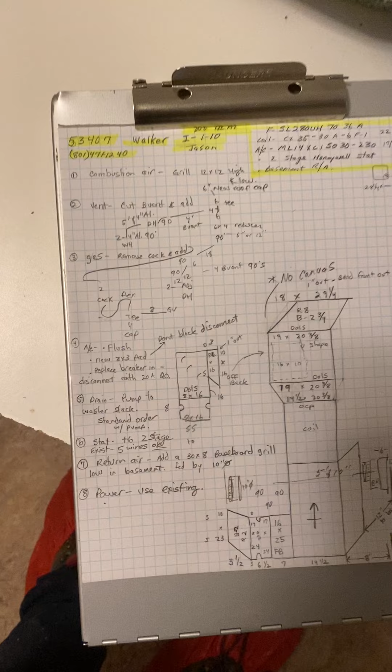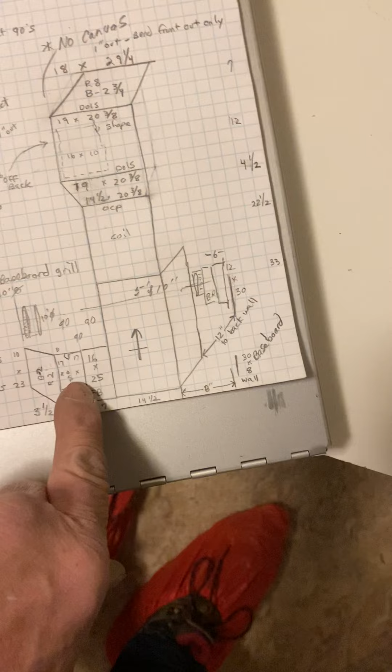Okay, this is for the Walker job, number 53407. Install on 110 by Jason. This is a no heat. Okay, so the duct furnace will just sit on the ground. I have a 7-inch wide filter box, no canvas. I have a cut line right here.

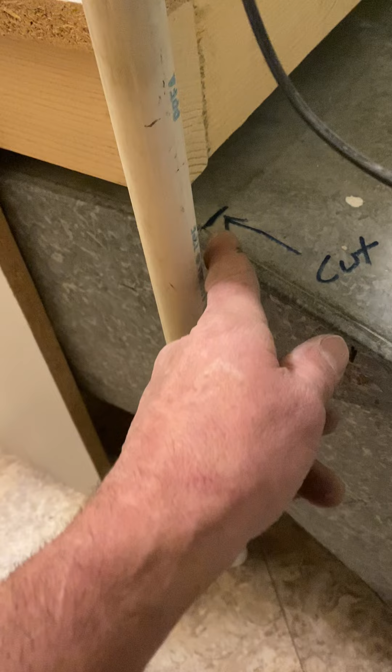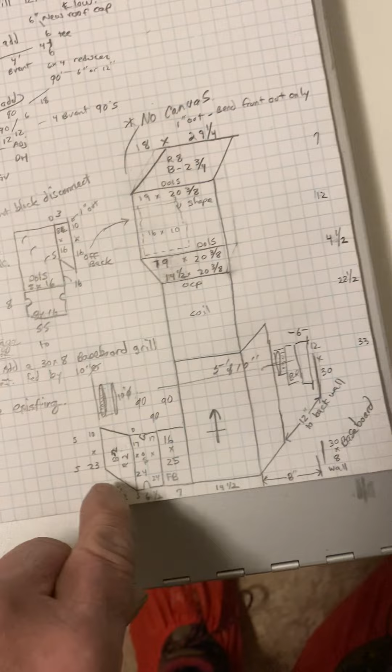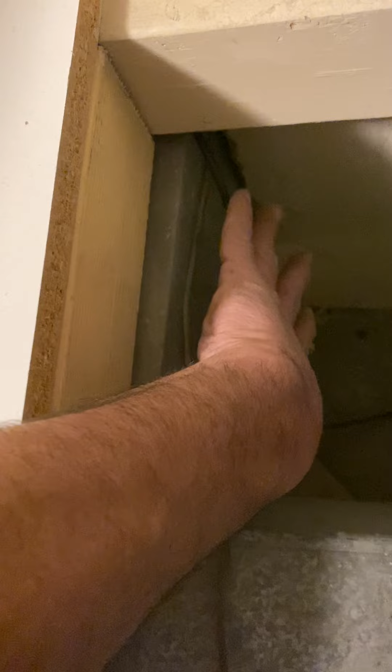So, you know, your adapter right there. 4.5 inches. Okay, so on the back of here, right here is your other cut line. So right here you have 10 inches. I'll give you a 10-inch round collar and some 90s, but you're going to add a 10-inch round return. You have 16 by 10 here. It'll be tight, but you can do it.

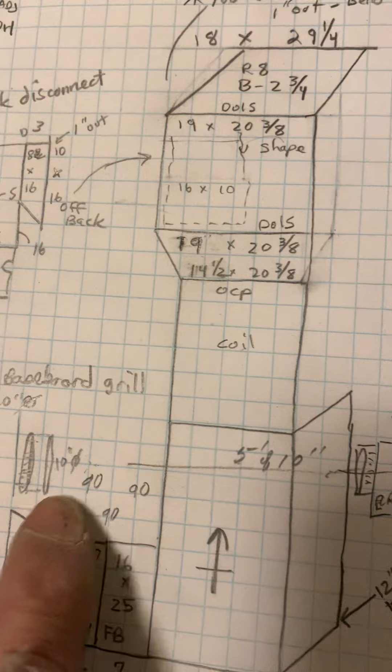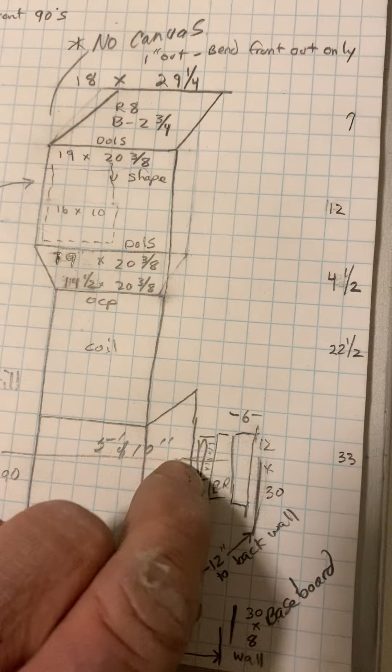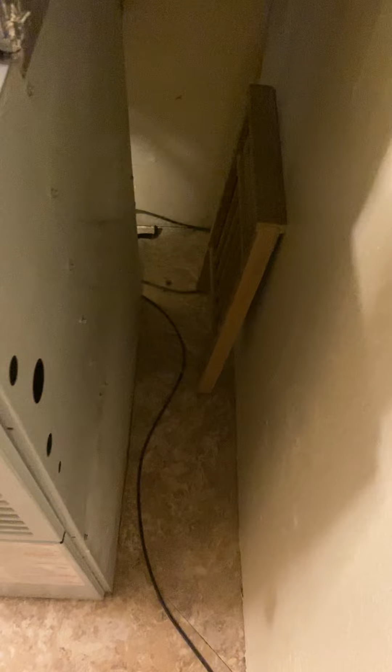And return air, I'll give you some 90s and 10-inch pipe, and I'll also give you, so that's right here, 5 feet 10-inch 90s, and I'll give you a 6-inch wide 12 by 30 duct with an end cap, and just cut these two 10-inch collars in, connect them with pipe. And then we're going to put a 30 by 8 baseboard grill right on the other side of this.

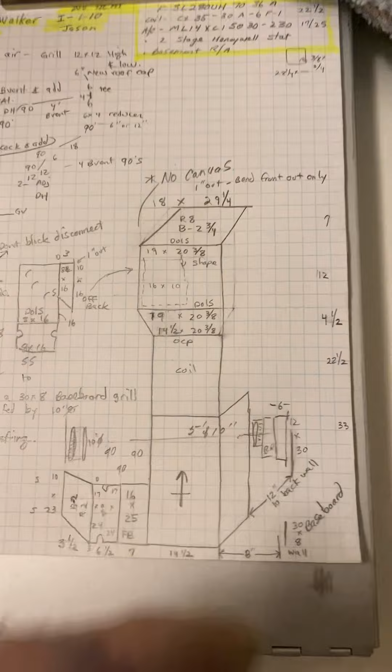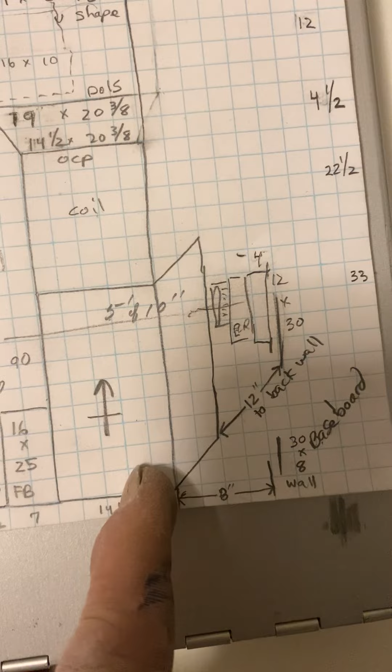And you know what? I moved the furnace so it's only 8 inches from the wall. So I'm going to just make this 4 inches instead of 6, so it's not so tight, come to think of it. It'll give you at least 4 inches to slide it in there. Okay, so yeah, this furnace is going to be 8 inches from this wall. And the furnace is actually going to move up 2 inches. So it'll be 12 inches from the back of the furnace to the back wall.

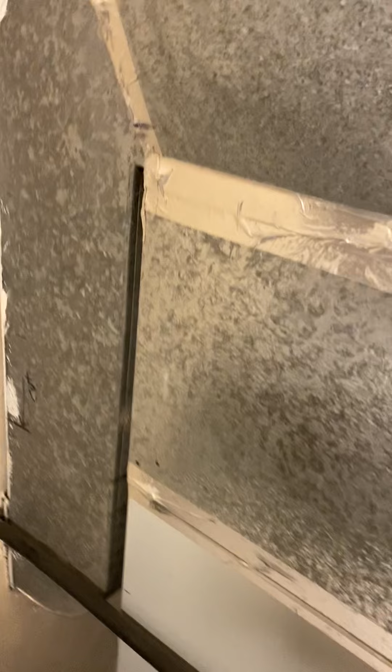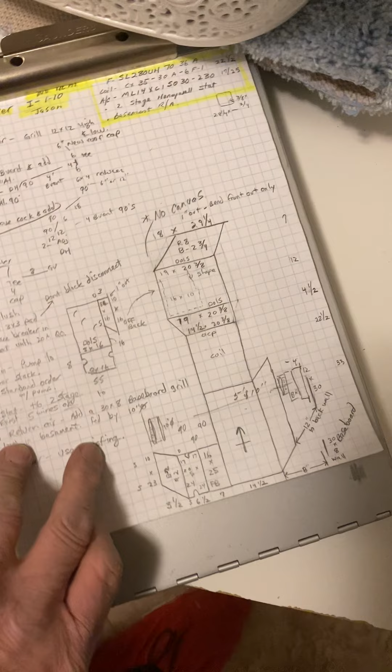And I did that because we've got this duct coming off the back, to get some sort of a starting collar on it. They've got plenty of room to the door to come up 2 more inches. Okay, so on the supply coil, I have just a little short piece to make it wider, because our furnace can be moved over, but then it comes out so we can tap into this duct.

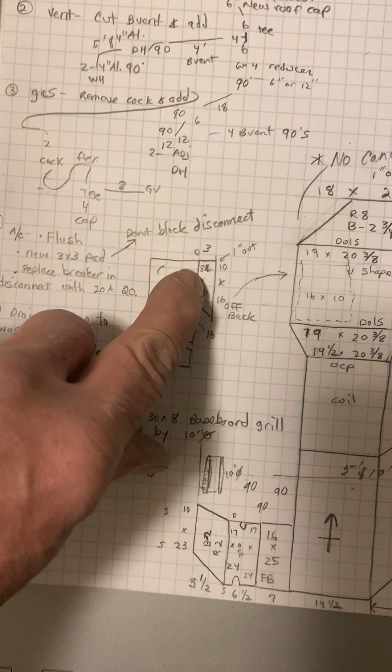And then a 12-inch piece. And then off the back of here, you're going to tap in a 16 by 10 starting collar. And then put a new 90 on, and then a canvas. I have a cut line right here. And I'm super sorry, you have no canvas on this supply duct here. I couldn't put one with this duct coming off the back. I didn't have any room to do it.

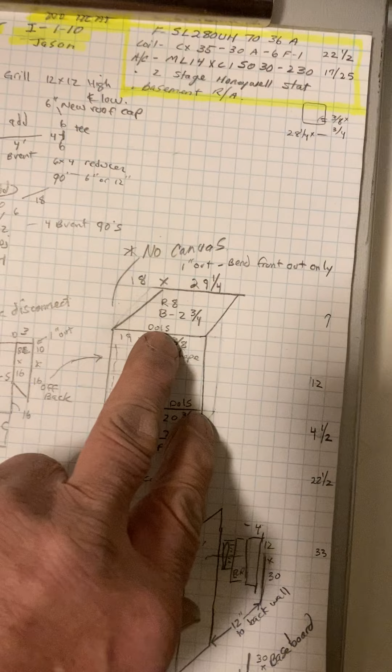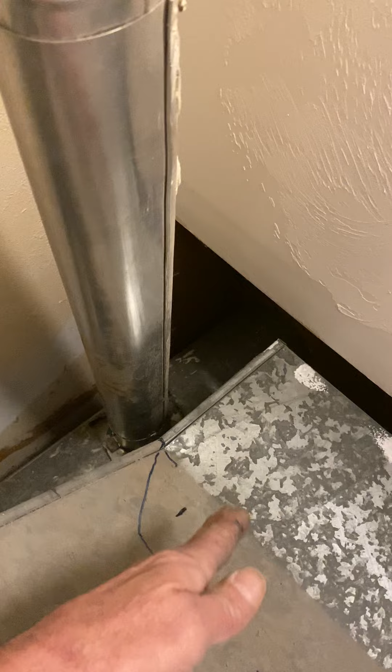But anyway, so then you have a starting collar here. So it'll set back 2 inches, and then I'll give you a cut line up right here. Okay, so this sits back 1/2 inch in, so you may have to adjust the sheetrock accordingly.

Okay, so the combustion air. There's no combustion air in this room, and it is their laundry room. I'll talk to her before I go, but this is my plan: we're going to have a baseboard return air grill here, and this is the only other place for it. So we have an 11 7/8, sorry, what is that? Exactly 14 inches. So that will fit a 12 by 12 grill. So we put one low and one high on both sides. I'll order 4 grills for that.

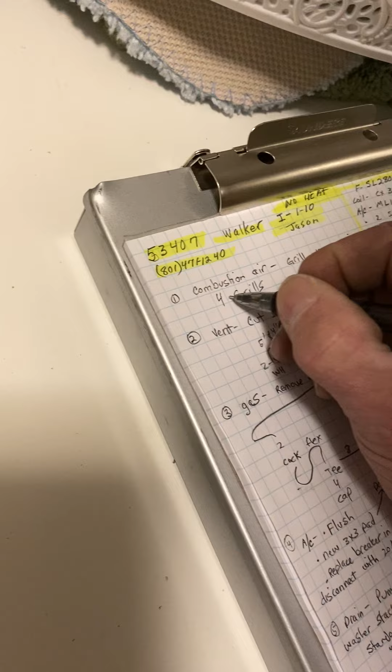Let's see. 4 grills. See, that's what's good about a video, because in my mind I was only thinking 2. Just realized it was 4. Okay.

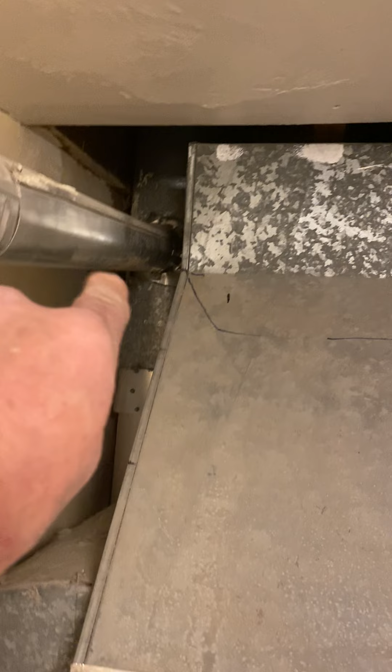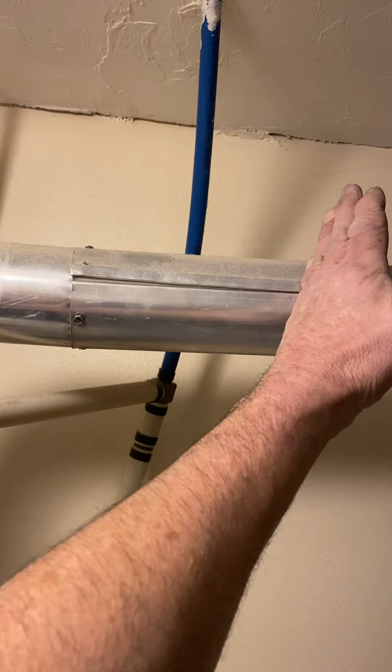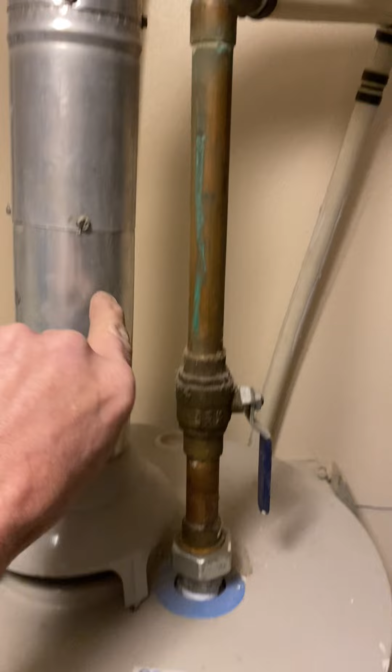Okay, the vent. This is an 80% furnace we're putting in, so this is 6-inch B vent. On the top, we're going to replace the roof cap. But then we're going to cut that up and put a 6x4 T and run 4 foot of 4-inch B vent. That will get us to about right here. Then I figure put on a 90, kind of at a 45 to get it a little bit away from the wall. And then a draft hood, and then I'll give you a few 4-inch 90s and some 4-inch aluminum pipe.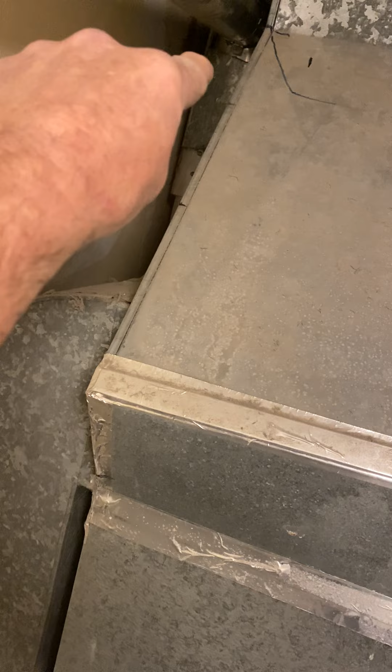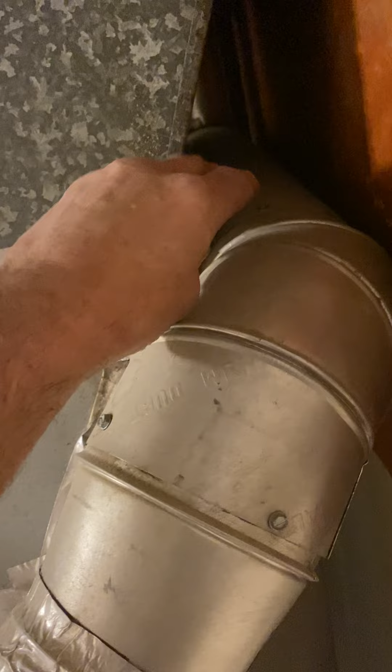Okay, on the bottom of that, you're going to put a 6x4. I'll give you a few pieces if you need to come a little bit lower to come under our duct. But anyway, 6x4 reducer with the 90. I figure we can just come through here again with a 4-inch. Fittings are just kind of how I wrote down, but come out with an 18-inch, and I'll give you a few different adjustable fittings to do what you need to do.

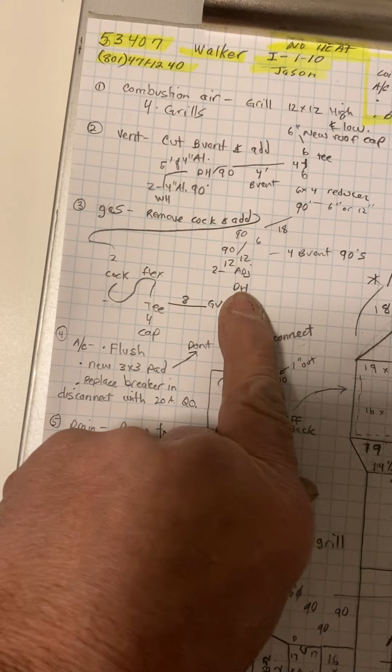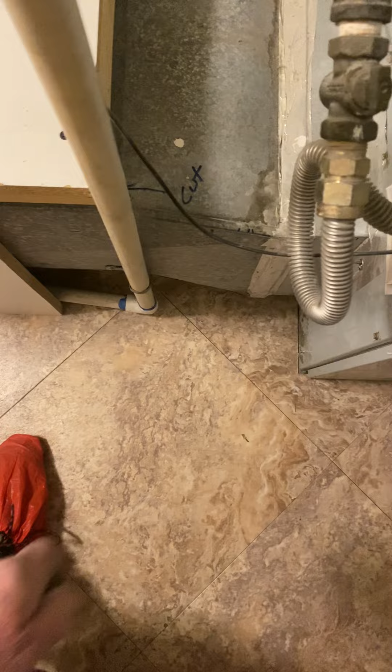Okay, on the gas, I figure we'll just tweak this 90 so it's level. Put a new cock on. And what did I do? Cock. And I'm sorry, okay. Anyway, so cock, then a 2 and a T with your drip leg and a flex, 8-inch into the furnace. I wrote that down wrong, that's why I was confused, so I'll redraw that.

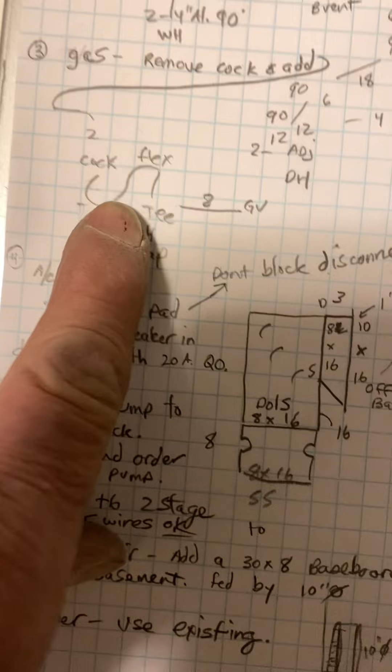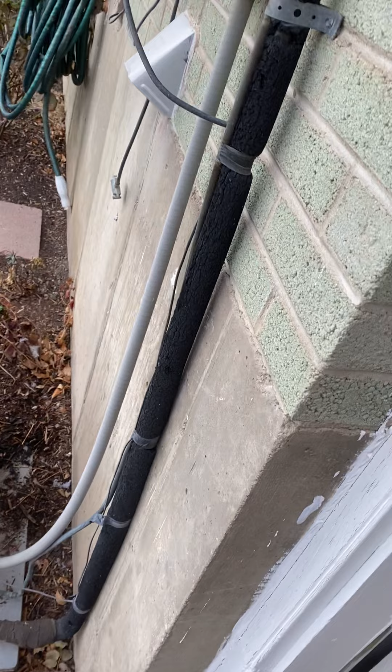Okay, so the AC, we're going to flush the lines right outside this door. So when you come here, just take off all this old insulation. Make sure you have 10 feet of the white Rubatex so you can slide it over that. Take your pliers and make that more round right there if you can at all. Kind of square it off so it's not bent like that, or anyway.

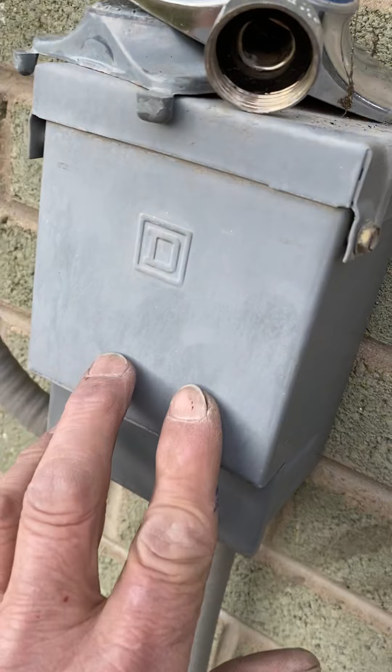Okay, so the power, so the pad, going to give you a new pad. Just scoot it over so you're not blocking the disconnects. You're going to have to scoot it all the way over, because you have this disconnect in this panel, and you might have to move these pavers. Oh yeah, the power is tapped off the main. It has a 40 amp breaker in there right now, so we just need to change this breaker to a 20 amp HACR breaker.

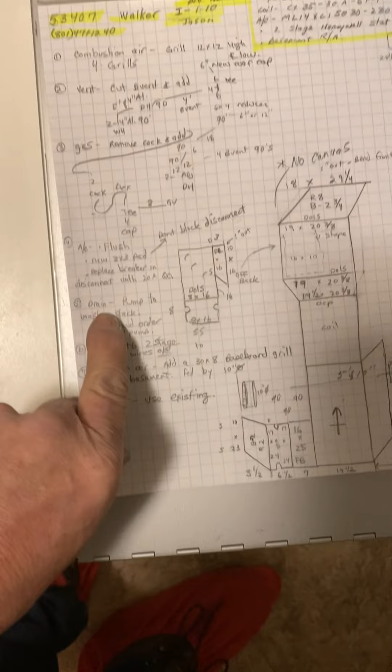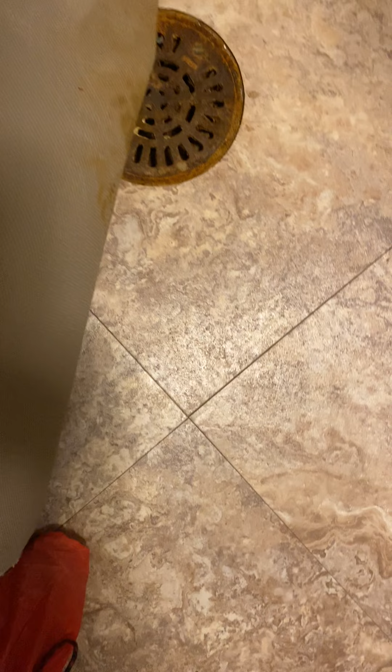Okay, so the drain. She wanted this changed. The drain did go to the floor, but the floor is actually right there, and she has issues with it, so she doesn't want it there. So we're going to add a condensate pump, and you're just going to pump it up and drop it behind the washer and put it in the washer stack right there.

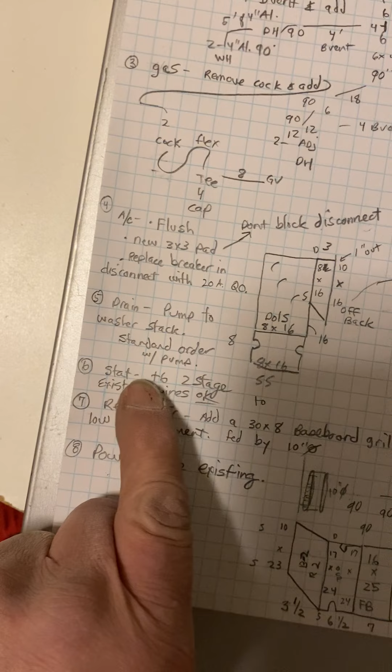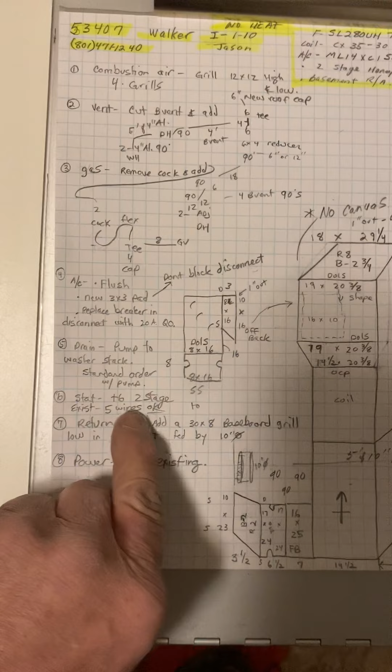Thermostat, just put on a T6 two-stage thermostat. We do have 5 wires existing, so you can use the thermostat with the batteries and power it with that for the 2-stage. Return air, I told you we're going to add the 30x8 in the wall there. Power, we're going to reuse this existing switch. That's it.